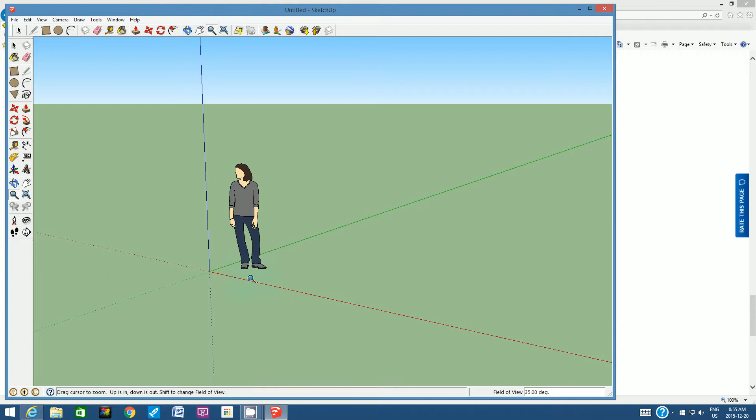Okay, so let's go to our SketchUp sketch. Let's zoom in towards the girl's feet. Again, we want to have the camera and the girl in the same shot, so we have that perspective, that size comparison.

All right, so let's click on the rectangle tool. And I'm not going to start on the red line, you can start on the red line if you want, you could start at the origin. It's just sometimes because those lines we can't delete, it's nice if they're not sitting right on the line. Okay, so I'm going to click once, don't hold the mouse, and I'm going to drag a rectangle out.

So I've got to think about these dimensions. So we have the thinnest dimension, and then we have the greatest dimension, I think is what we're going to go with. So I'm going to type in 9.52. Actually, I'm going to do something first. All right, I'm going to undo this. So I'm going to go to Window, and I'm going to click on Model Info.

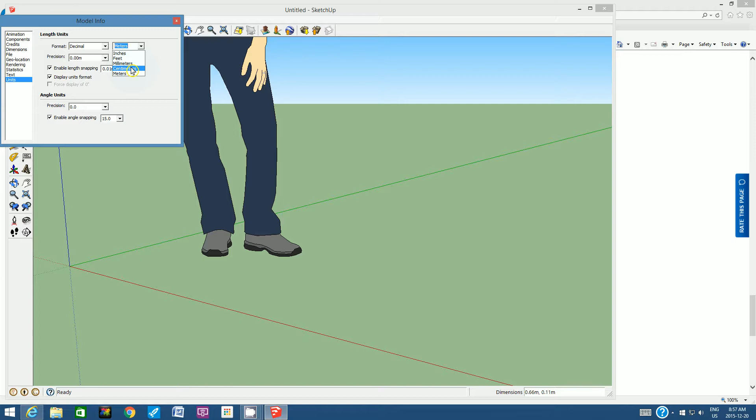So click on Model Info. Down the left-hand side, click on Units. In the Format window, choose Decimal, and for the units, click centimeters. So now what we're doing is activating the centimeters template so that everything drawn now will reflect in centimeters. Okay, there's no OK button, so let's just close.

All right, let's try that again. Remember, this project is a lot about problem solving. So I'm going to click once, don't hold the mouse button, and drag a rectangle out. I'll try my largest dimension, 9.52 cm, comma, space, and then my smallest dimension, 2.21 cm, and click Enter.

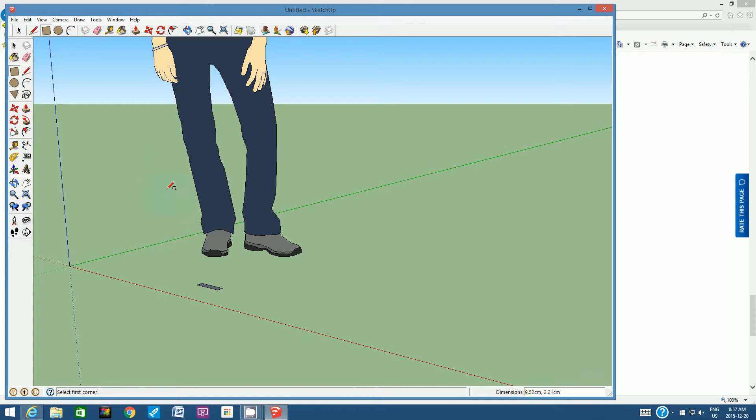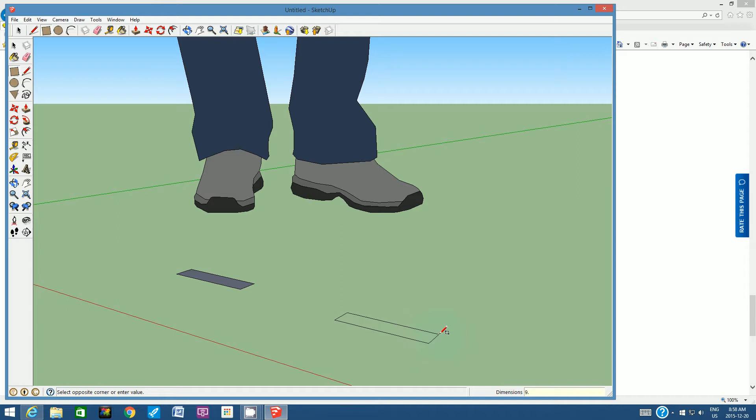Okay, now that kind of looks like the base of my camera. So I'm going to show you two techniques, so I'm going to draw two cameras. You only need to draw one, but I'll show you two techniques depending on how the body of your camera looks. I'm going to click on another rectangle here and do the same thing: type in 9.52 cm, comma, space, 2.21 cm.

All right, so here we go. There are two ways you can draw this camera. The first way reminds us of a project you did for me in grade 7 called the pencil case, and when you drew the Apple device model for me last year. So we're going to use the arc tool to round off these sharp corners here.

Okay, so once you have one, you can't make the arc too small and don't make the arc too big. For example, don't start over here and make the arc because then it's not going to look right. Once you've created one arc and you like it, rest your mouse over the end point, don't click, and that should allow you to draw a line across.

Is it going to show? There it is, the red line across, and that'll line up across the top edge. So then I'm going to create the other arc, and if I'm on the end point here, I should be able to drag my mouse down, and it should be a faint green line to line up that edge.

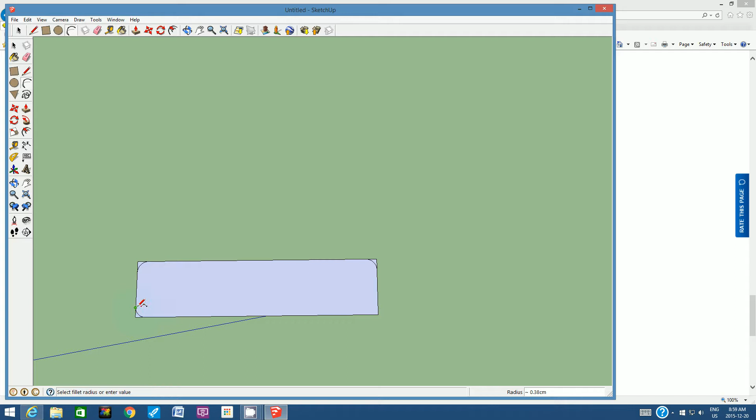Looking for the pink line for the arc tool. Let's see if I can get that red line. There it is. Okay, so you used that technique for me last year a few times.

Okay, so I'm having trouble with that one. Let's try it from the top here. Let's see if I can get the green line coming down. Yeah, okay, there it is. There's the pink line, okay.

All right, so once I've got the four arcs, I've got the rounded corners, I'm going to cut them off. Now, it's very important that you cut off these corners before you make the 3D object. Once you make the 3D object, it's a little bit different technique to round off these corners.

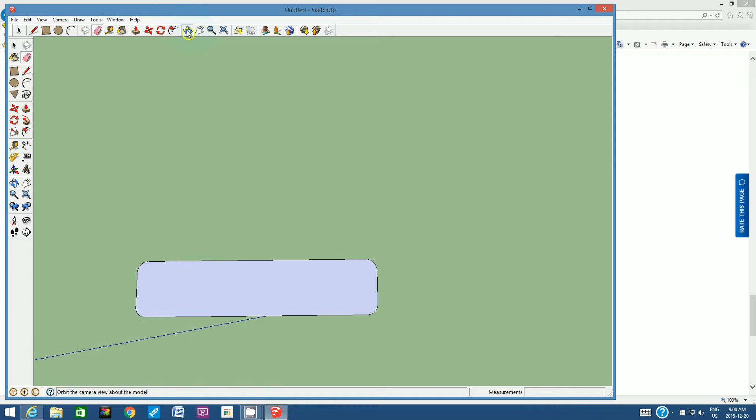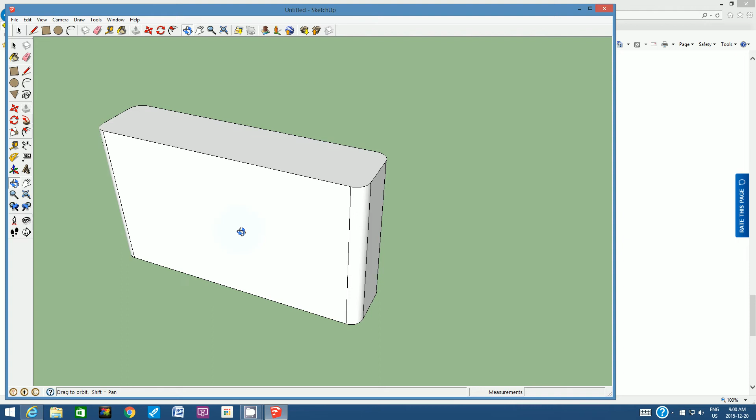Okay, all right, so now I have my last dimension. I'm going to use the push-pull tool, and the last dimension I have written on my piece of paper here. I'm going to click once, don't hold the mouse, just pull your mouse up, don't hold the mouse button, at 5.43 cm. Okay, so that is the shape and the dimensions of the box that's going to be my camera.

Okay, all right, so let me show you the different technique.

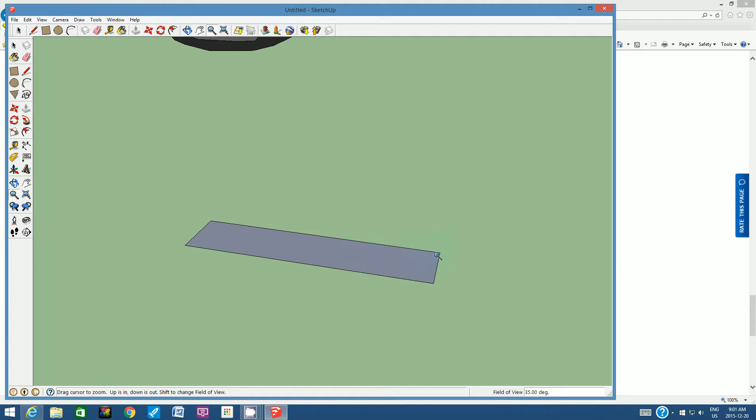And it all depends on the camera that you are trying to draw. Okay, so this time I'm not going to round off these edges. I'm going to click the push-pull tool. Going to click once, don't hold the mouse button, pull upwards, and do 5.43 cm. There it is.

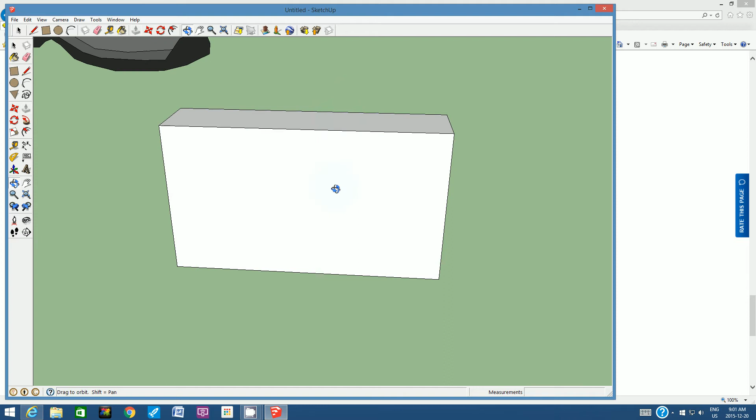Now, depending on your camera, it might have rounded edges this way. The other camera had rounded edges when we looked at it from the top. But some cameras, if you look at them from the front, they're rounded on these corners. Now, unfortunately, in SketchUp 8, we can't round off in both dimensions. For example, we can't round off from this side and this side. So let me show you how to round off from the front.

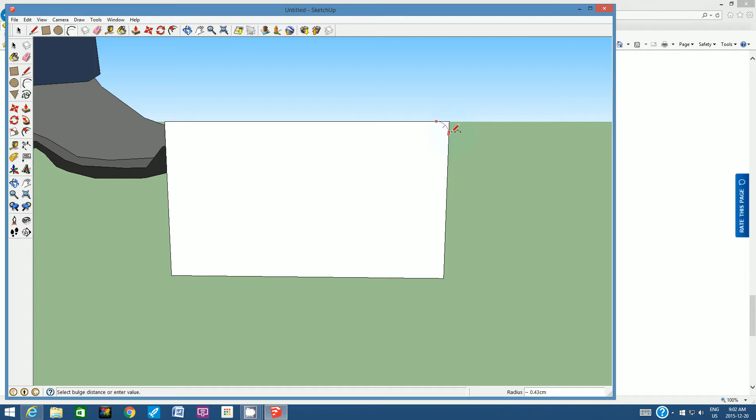So what we're going to do is, remember, the difference is we've already created the 3D object here. So let's use the arc tool and let's cut off the corner here. And then I'm going to zoom into that corner and kind of look at that corner from the side. So let's see if this is going to work. I think if we click on the push-pull tool, and if I click on this part of the corner, it should eliminate it. Okay, so I'm going to do that again.

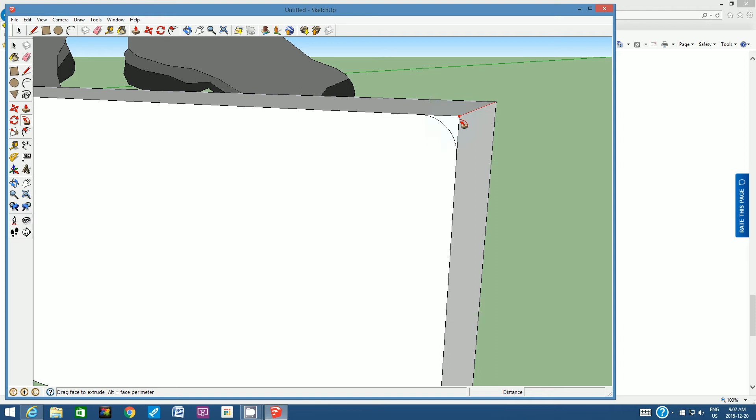So I'm going to click once, and then I'm basically going to push back to the back edge, and I'm going to click a second time to finish that action, and there it is. Now I've got a rounded corner looking at it from the front. So if I zoom out, that's what it's going to look like. So you can do that on the bottom, you can do that on the four corners.

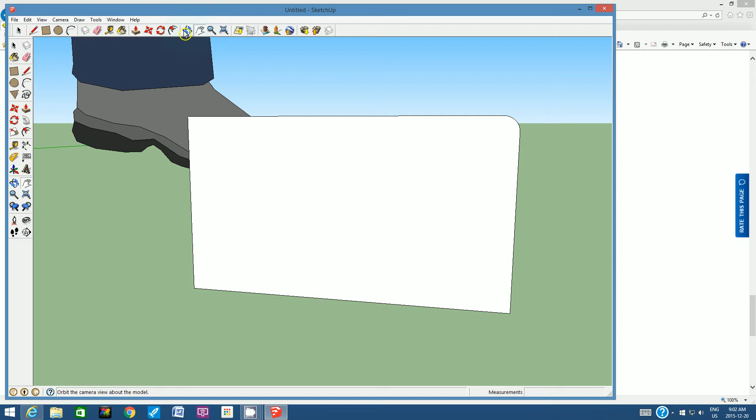Now, the thing about my camera is, again, this is where you have to look back at the picture, is that my camera is straight along this edge and it's got this nice curve here. A lot of Canons do. So let's use the arc tool technique. Click once in the top corner. Don't hold the mouse button. Click twice in the bottom corner and then push out a little arc here. Okay, don't go too far. It's just gradual, something like that.

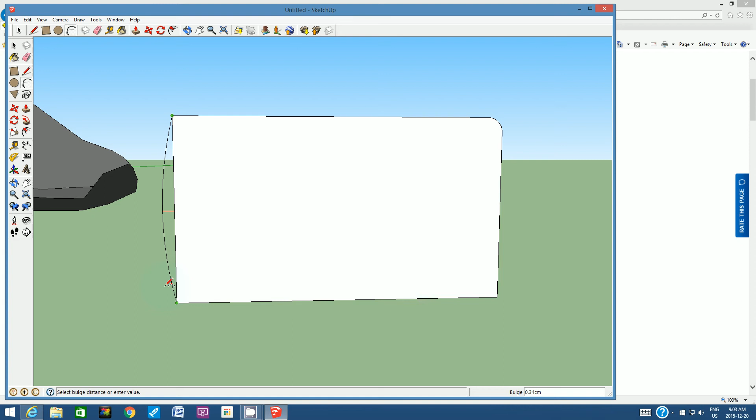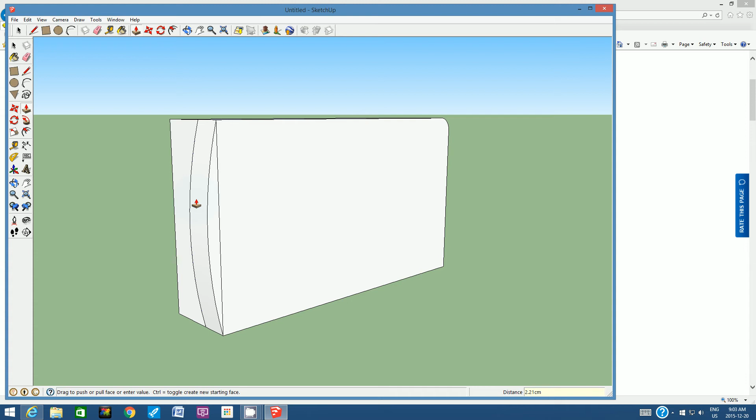And then all I need to do is I just need to push this back. Now, if you want to be as precise as you can, my depth is 2.21. So that's one of the numbers I've written down on the piece of paper in front of me. So I could click once, push back, and I could go 2.21 centimeters. There we go. Now, this line we can simply hide, right? We could right click and just do hide.

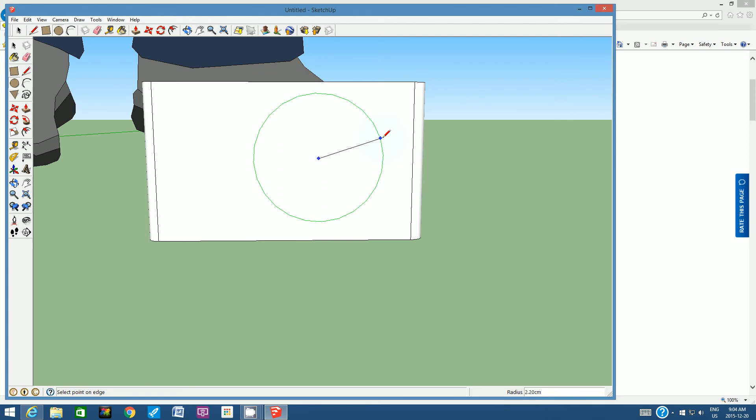All right, so what do we do about the lenses? The lenses you don't need to measure, but you need to kind of guess their position. So this is going to be trial and error. So if I draw a lens like this and then I look at the picture and go, well, it's almost at the edge of the top and it's almost at the edge of the bottom. So is that really centered? You should be able to move an object once you draw it using the move tool. Let's see if that's going to work. It's not as precise as you might like, but looks like I am able to move it a little bit up and down.

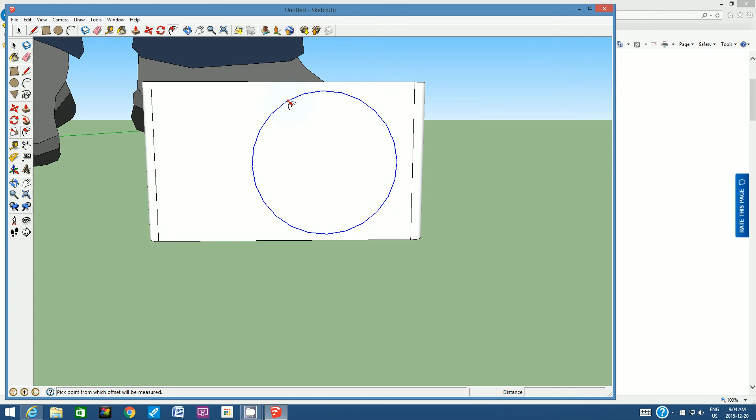Okay, so once you get its position, instead of redrawing the circle over and over again, let's use the offset tool. If we click once, then you can draw a smaller ring. Now the cool thing about digital cameras is the lens has all of these rings that are really going to make it look like a camera. And then you've got this window with the inner lens in it here, and then you've got so many rings.

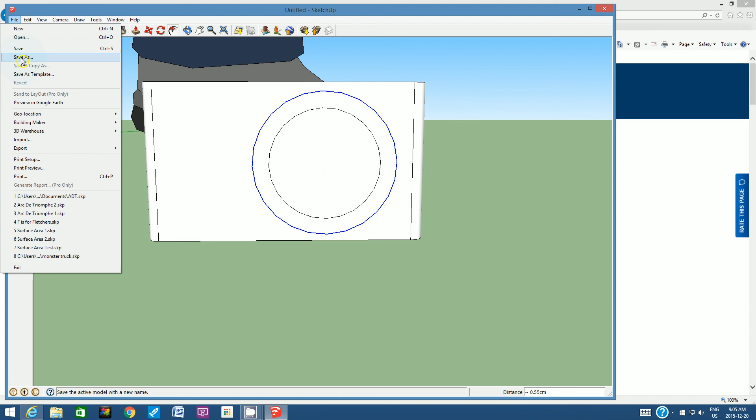Okay, so hopefully I've pushed you in the right direction. You can go to other websites to try and find 3D images or just more in-depth images. You just have to type in a Google search of your particular digital camera that you're drawing. Okay, so let's make sure that we save this. I believe the instructions ask you to save it as camera model. And keep saving, very often. I don't want you to lose any work.

Take your time. Put as much detail as you can, not only on the front, but on the back, on the top. And again, depending on what your camera looks like, I've shown you a couple techniques to get started.